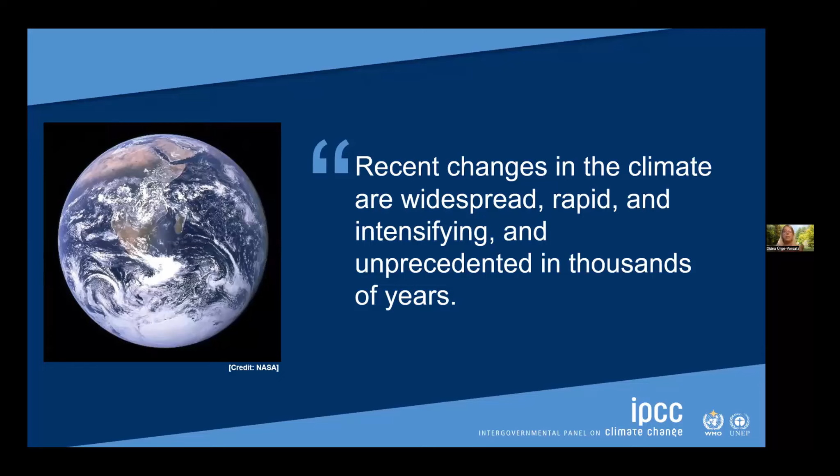But let's first get to the climate science a little bit. Our first report showed that recent changes in the climate system are already widespread, rapid, intensifying, and unprecedented in thousands of years. In fact, that's a very conservative number, because if you look at actual numbers, global carbon dioxide concentrations and ocean surface acidity have not been so high as today for 2 million years.

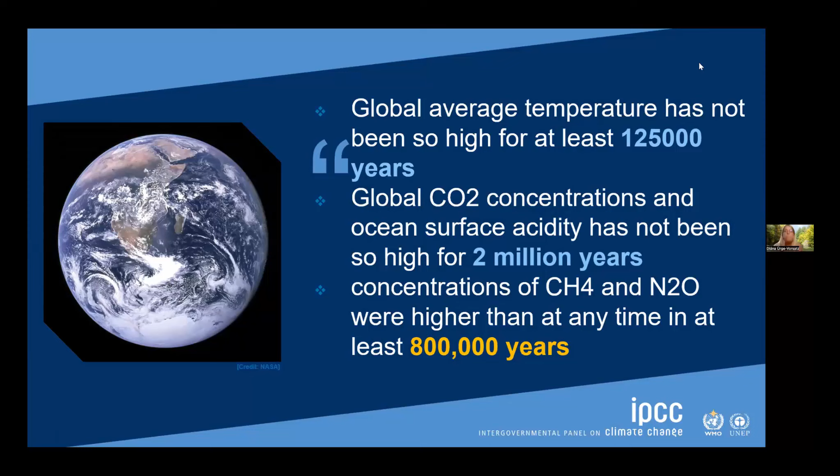Global average temperature has not been so high for at least 125,000 years. So in less than a generation, we have turned back the geological clock of the planet by anywhere between 100,000 to even 2 million years. Concentrations of methane and nitrous oxide were higher than any time in at least 800,000 years. So in very short time, we have already changed our planet very significantly.

The reports also show that, unfortunately, there are some changes in the climate system from which there is no more going back - meaning they are irreversible. For example, the ocean temperature will keep increasing even if we don't emit even a molecule more of carbon dioxide, will keep increasing for hundreds or even thousands of years.

The same with many ice sheets, including the Greenland ice sheet, but also the ice sheet in Antarctica, will keep melting and destabilizing for hundreds or even thousands of years. And along with these, the sea level will keep rising also for hundreds and thousands, or perhaps even on a 10,000-year timescale.

But even worse, there are the so-called tipping points, many of which we might be very close to. These are points in the climate system - and it's like when you swing on a chair, and if you let go, you swing back. But if you swing back a little bit too much, the chair wouldn't return, but just fell back and there was nothing for you to do. There are similar points in the climate system.

For example, beyond a certain point, we are just not going to be able to stop losing the Greenland ice sheet. And it's not very far, because it's anywhere between 2 and 3 degrees warming compared to pre-industrial average, and we are already above 1 degree, and may actually be reaching 2 degrees in the middle of the century - within lifetimes of many of you. Similarly, the collapse of the West Antarctic ice sheet, abrupt collapse of the Atlantic meridional overturning circulation, which is further for you, but for us is very crucial with regard to Europe's climate, the Gulf Stream.

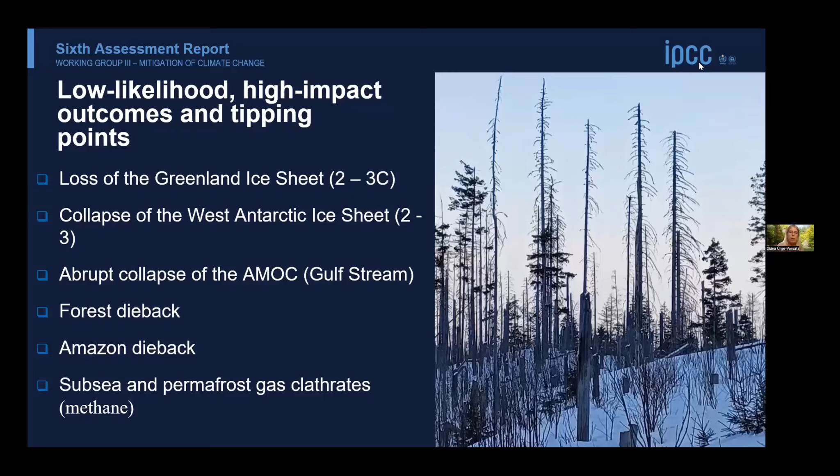But before you get too desperate, the good news is that some changes can be slowed and others can still be stopped if we limit warming.

The point is that even if a lot of things are already very bad, many things will be even worse. Historic temperatures are fairly constant, basically in the plus-or-minus 1 range for 10,000 years. And we already, in just a matter of 2 centuries, have shifted this by about 1 degree centigrade. It's almost certain that by the end of this decade we are already going to reach 1.5 degrees.

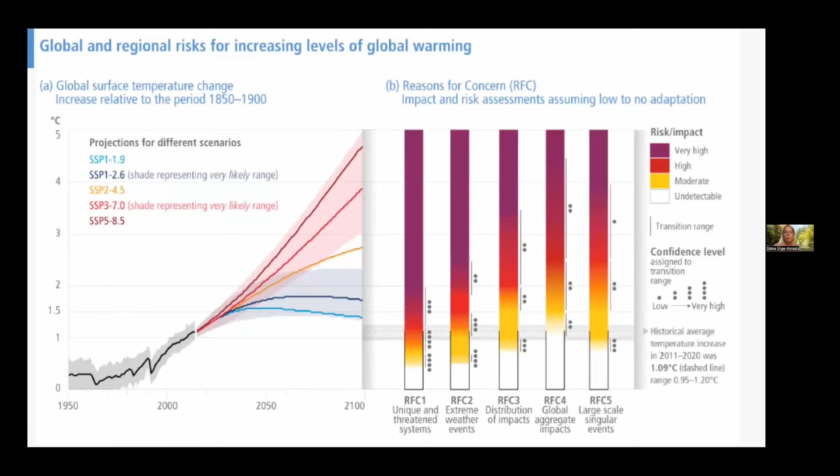But at 2 degrees, we are already entering in many systems - you don't have to read the different bars, because we do these bars for all kinds of systems. But the point is that the more reports we do, unfortunately, the red and the purple is going more down and down. In fact, in our previous report we hardly had any purple. But now with more understanding, we understand that actually the impacts are going to be more severe with lower temperatures, the more and more we understand.

So as I mentioned, it would be really important to try to keep the warming well under 2 degrees, or at best at 1.5 degrees. But unfortunately, what our report shows is that unless there are immediate, rapid, and large-scale reductions in greenhouse gas emissions across all sectors, limiting warming to 1.5 degrees will be beyond reach.

What do we have to do to limit warming? This means that limiting human-induced global warming to any specific level - meaning 1.5, 2, 3, 5, 6, 10, any degree - does require reaching at least net zero carbon dioxide emissions, along with strong reductions also in other greenhouse gas emissions. So that basically implies that getting out of fossil fuels, or leaving fossil fuels in the ground, is non-negotiable. We just have to leave them there.

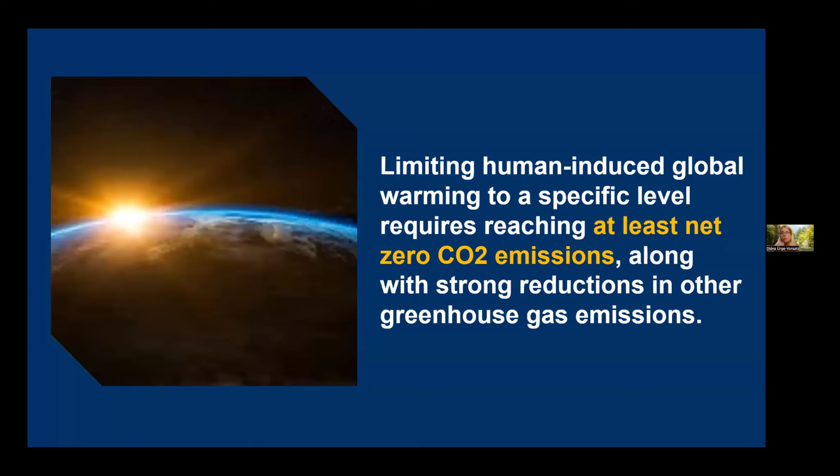So that means that if we have to do that anyway, the sooner we get there, the lower we will be able to stabilize temperatures. The quality of life of not only one generation, but hundreds of generations to come, really depends on how soon we can get this done. And that's a tremendous responsibility.

Now, the good news is that our report put a very big emphasis, for the first time in IPCC's history, on demand and services. So not only asking, okay, where can I get the next clean kilowatt hour of energy, but to first ask: do I really need that kilowatt hour of energy? Maybe first we should figure out how not to have to produce that next kilowatt hour of energy. And we have a whole dedicated chapter on that.

And the chapter shows that actually we have a potential to bring down global emissions simply through influencing energy demand by up to 70% by 2050. Buildings are among the biggest opportunities within that. However, it's important to point out that this can only happen if individuals are able to make the choices enabled by systemic changes, meaning changes by housing, changes by cities, and so on.

So we also concluded that it is possible to reach net zero emissions in the building sector by 2050. And the report really warns that action in this decade is critical to fully capture this potential, because of the long lifetime of buildings, and because every year we can only change a certain number, a certain share, of the building stock to net zero.

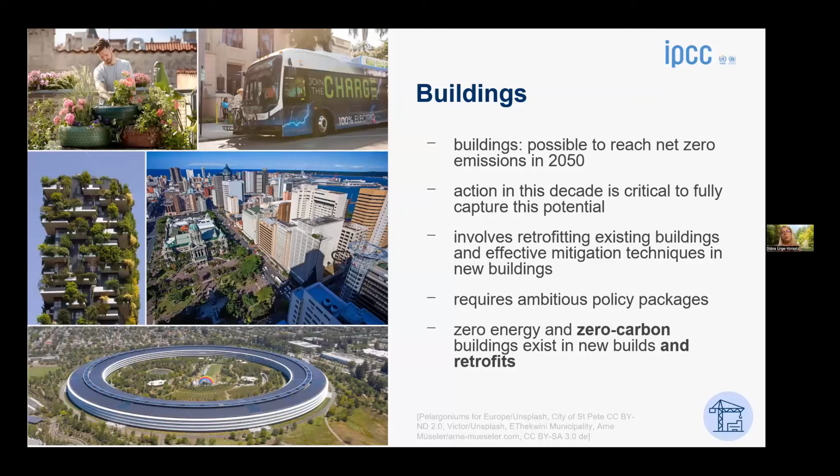So it does require ambitious policy packages, and retrofitting is crucial, especially in developed countries. What the chapter shows, which we also showed in our papers before, is that by today, in every climate and virtually every building type, it is possible to convert every building to net zero energy levels, not net zero carbon, but net zero energy levels.

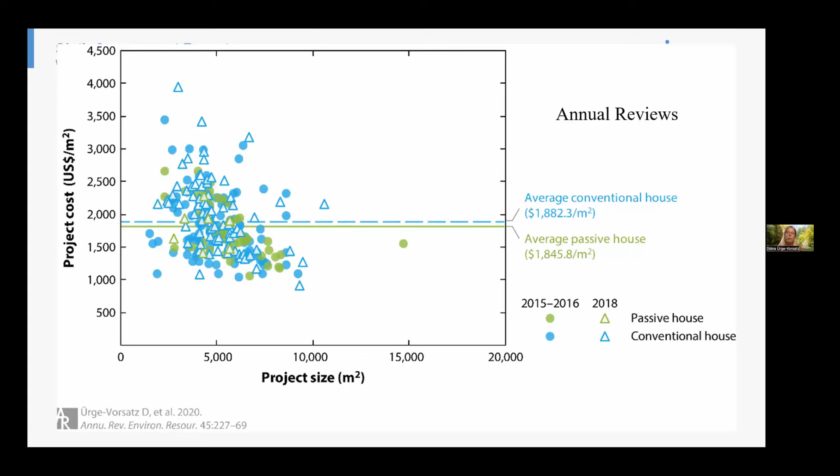There are many such examples showing this is not a cost question - for new buildings, it's definitely not a cost question. But we have to go on, as we mentioned, when we build buildings it's really important to try to avoid as much as possible energy intensive and carbon intensive materials. Maybe in New Zealand you have lots of timber, so that's very important, but not every country has a lot of timber - for example, in Europe we don't have that much timber.

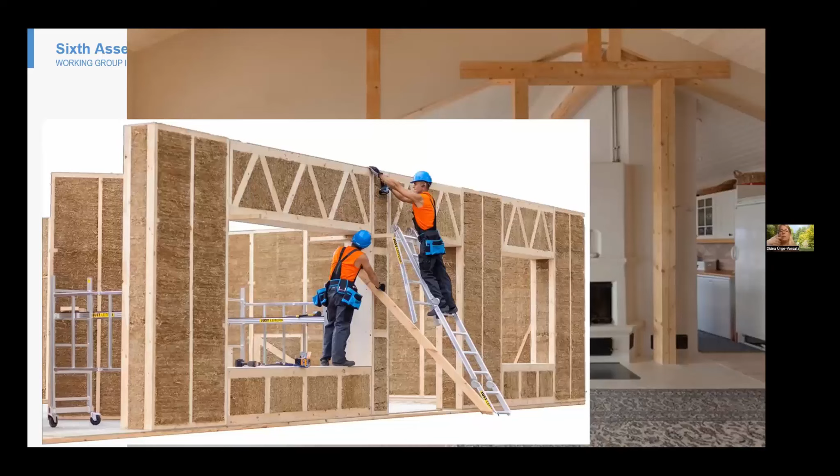Nevertheless, this house is actually made of straw. Even straw is an excellent material, and there are now multi-story buildings from straw, highly industrial. I don't know if you have these building materials available, but the point is that they capture and store carbon, and the longer the building stands and is used, the longer it's storing the carbon - so it's a double win. It's also very important.

And, sorry for the Hungarian text, but what we also showed is that retrofitting even for historic buildings is possible for net zero. This is actually going to be the new home of my university, and this is the biggest Art Nouveau building complex in the world. This is in Vienna, designed by Otto Wagner - it's a beautiful building ensemble.

What we showed in this research project is that even this beautiful old building district can be retrofitted to an energy positive district - turning it into the power plant of the 21st century, while observing the strictest national monument protection rules. All of the characteristics and criteria for observing and respecting the work of Otto Wagner will be maximum preserved. And not only is this going to be an energy positive district, but what we are showing here - you don't need to look at the details.

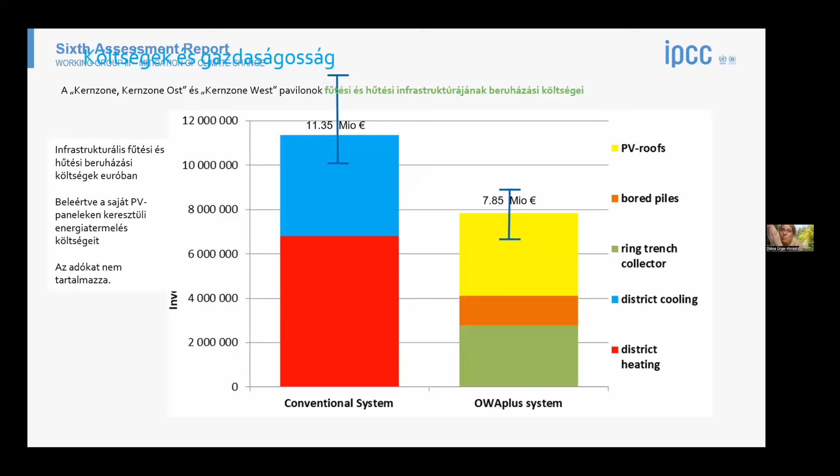But if we know this is really a win, you can eat the cake and have it, and get paid for eating the cake and having it. But we are still not doing it at scale, and that's very concerning. The only thing I can imagine is that we all know there should be change, but none of us wants to change.

And if we continue, we really will be in trouble, because our future is determined by a sum of reducing emissions, adapting to the remaining climate change where we couldn't reduce emissions, and where we can't adapt, there are many things to which we will not be able to adapt, and the remaining suffering. But today we can still determine what mix of these three our future will look like.

Now we can still choose how we want to mitigate, which technologies, which ways, and so on. But in terms of how we will suffer the impacts of climate change if we fail to mitigate thoroughly, we will have no choice. So our future climate depends on our actions today, and on you not allowing any other type of building to be built, and on you making sure every building you touch is retrofitted to net zero energy. Because every time we miss that, we may be locking ourselves into a higher temperature future. Let's look up. Let's not do like the dinosaurs did.

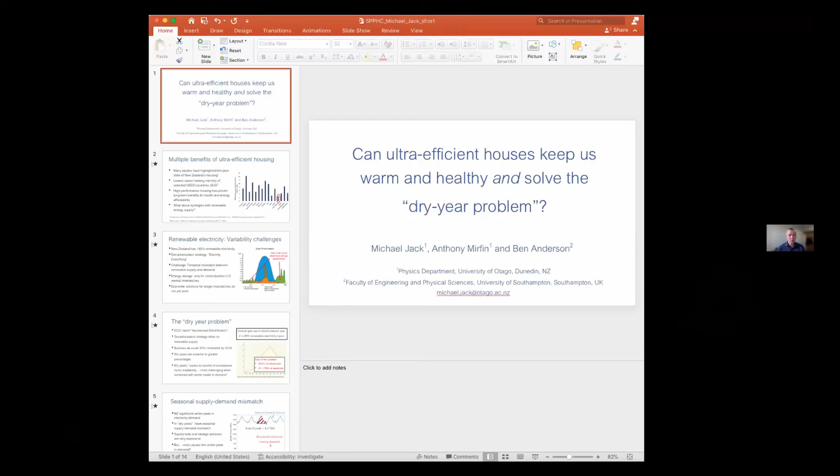So I'll just share my screen now. Can you see that screen okay? What I want to talk about is, I guess, a very New Zealand aspect of energy efficiency.

So it follows on really nicely from the global perspective that we just got. This work was done in collaboration with Anthony Mirfin, who was an undergraduate student at the time, and Ben Anderson from the University of Southampton.

Many studies have highlighted the poor state of New Zealand housing, and you'll probably hear a lot more about this in the rest of the webinar. One example is that in a recent BRANZ report, 46% of dwellings are not heated in winter in New Zealand. A third of houses are regularly heated. Half of children's bedrooms are not heated at all, and there's visible mold in half of the houses surveyed. So there's a lot we can do to improve our housing.

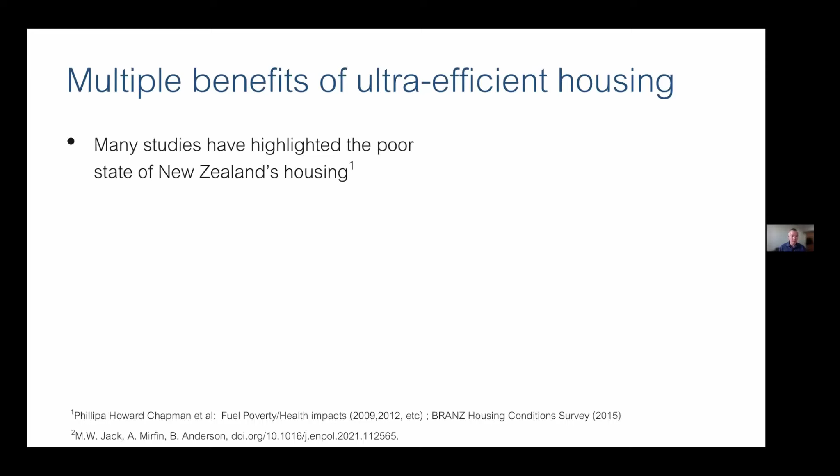And I like to show this graph because I find it quite interesting. If you take the IEA statistics, you can see that New Zealand has the lowest intensity of space heating for all OECD countries, and this has been corrected for temperature. Now, at first sight, you might say New Zealand seems to be extremely energy efficient, more energy efficient than Japan with their apartment-style houses. But the fact is that our low space heating intensity is because we significantly underheat our houses compared to all these other countries.

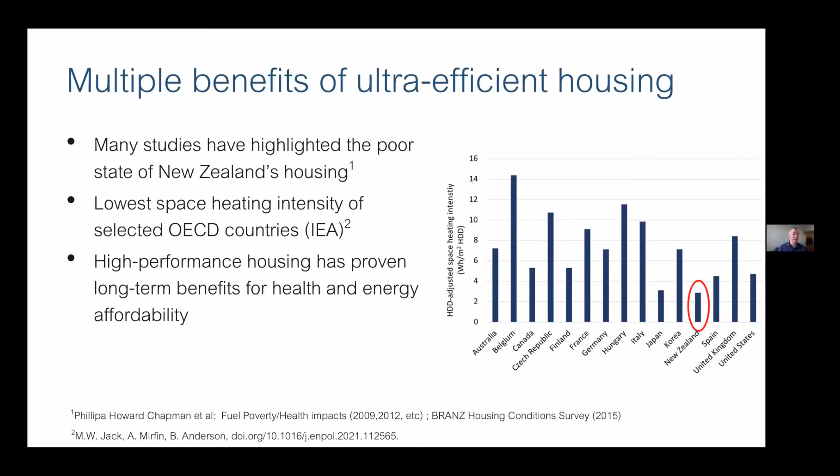I'm sure there'll be more talks about how high-performance housing has really proven the long-term benefits for health, energy, and energy affordability. But what I really want to focus on here is the synergies between energy-efficient housing and renewable energy supply.

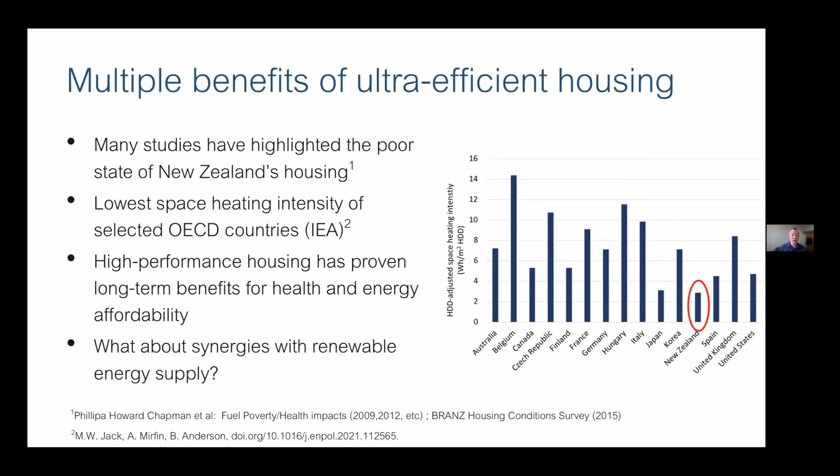In New Zealand, we've already achieved around 85% renewable electricity. So it's kind of obvious that our decarbonisation strategy is basically electrify everything. So this is taking transport and heat, electrifying transport and heat, and supplying that with renewable electricity.

So that brings me to the dry year problem. This has really been clearly articulated in the Interim Climate Change Committee report, Accelerated Electrification.

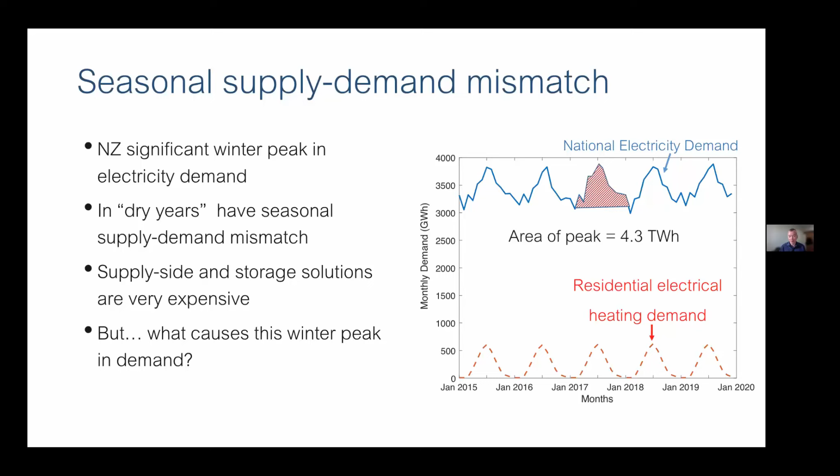I'd just like to show you a little clue down the bottom here. This is residential electricity supplies, so this is heating demand estimated. I'll come back to that in a moment, but that's a bit of a clue of what's causing that issue and what we might be able to do about it.

So because of the dry year problem, MBIE has created this thing called the New Zealand Battery Project. The idea is to try and solve this dry year problem.

Now there are a bunch of options that have been talked about. One of them is overbuilding renewables, which basically means creating enough renewables that you can cover your peaks. But of course that means in some cases you have more renewable energy than you need, which would probably occur in summer in the New Zealand case. In the electricity sector they often call that spill, with an analogy to hydro, but essentially you're losing that supply, and it means it's an expensive option.

Another option is large-scale demand interruption - this might be turning off some very large-scale industries for an extended period of time. We're talking about 8 months here.

Another option is geothermal. We have lots of geothermal energy in New Zealand. We could use our geothermal much more strategically and turn it up and down to follow demand. This is not really the way geothermal energy is used at the moment - it's much more of a base load.

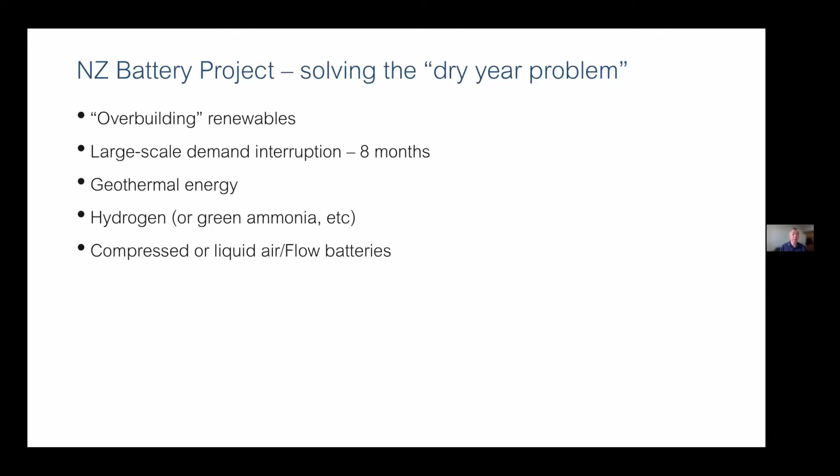We could use hydrogen or hydrogen derivatives, green ammonia, etc., to store the energy. We could also store it using things like compressed or liquid air, compressed air, flow batteries, etc.

The solution that is probably the one people are most interested in is this idea of a pumped hydro storage scheme - very large scale pumped hydro storage, and even a location has been thought about for this. It's at Lake Onslow. The idea of pumped hydro storage is where you have excess energy, you pump the water back up to a reservoir, and when you need that energy, you let it back down through your turbine and generate again. These are very common, the most common large-scale energy storage systems in the world, and as you can see, this Lake Onslow idea offers about 5 terawatt hours of storage.

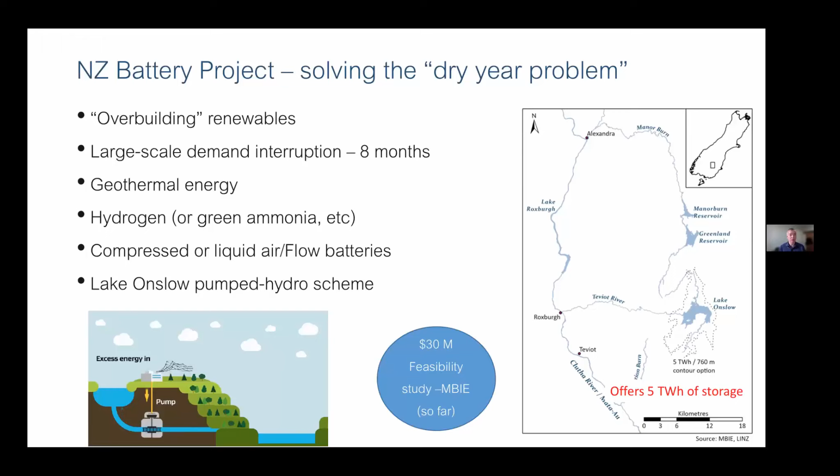And so MBIE have spent around about 30 million on a feasibility study to investigate solving the dry year problem.

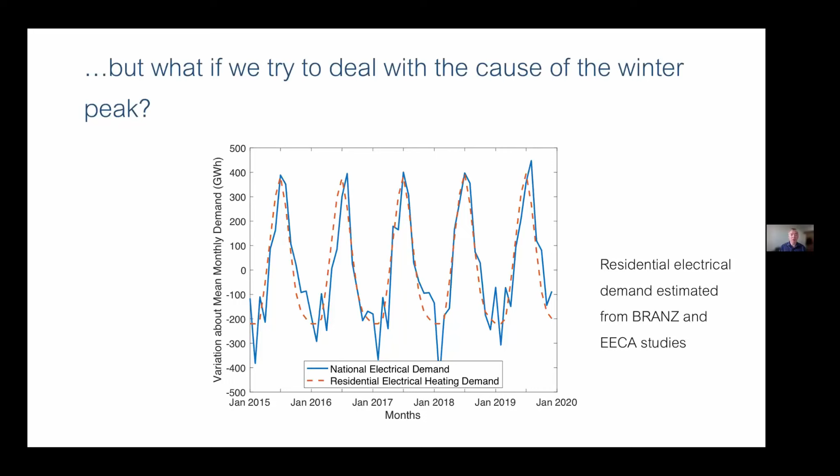Because of this, we wanted to study whether, if we went to very efficient houses, we'd be able to reduce this peak, and therefore this dry year problem, this winter peak problem, could go away. So this is what we set out to do.

Bit of tongue-in-cheek here. As I said, we used a talented undergraduate student to do this study, so they cost about 5K compared to that 30 million.

We took a strategic approach for this study. We really need to be looking at a long time period, since houses exist for a long time. You really need to consider a long time period to understand the impacts.

We focused on detached houses, and we could be criticized for this since a lot more apartment buildings are being built. However, at the moment, we're still getting around 90% of our floor area from detached houses, just because they tend to be larger.

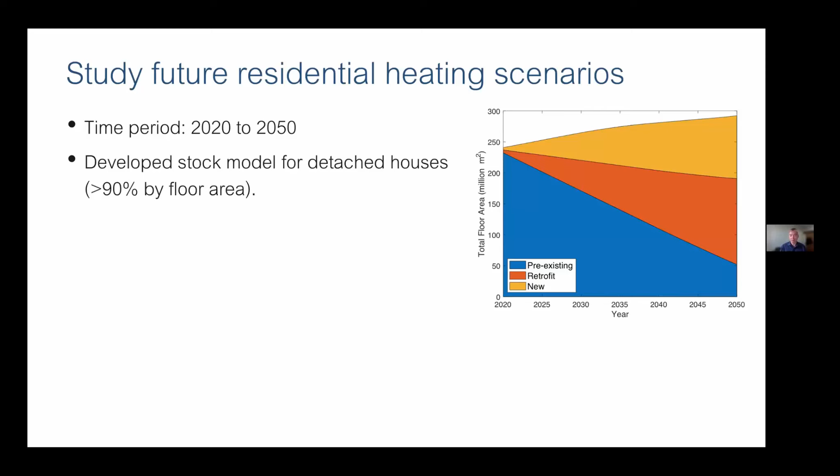A whole lot of assumptions went into creating this stock model. This is the total floor area of housing in New Zealand, and we considered both new houses and energy efficient retrofits—quite an extreme rate of retrofit that I've shown there, but it's something we kind of need to do if we were going to have a large impact. If we just focused on new houses, that would not be enough.

We considered a range of different building standards for new builds and retrofits—this should be of interest to this audience. We looked at the New Zealand Building Code, before the latest iteration. We considered a medium and a high scenario, related to Homestar standards, and then a very high scenario, essentially the Passivhaus standard, including the retrofit standard.

We also looked at another scenario, a progressive scenario, taking the current building code and over time, up to 2050, moving to a Passivhaus standard. The idea behind that progressive scenario was to say, if we did this really slowly, would we get the same benefits as if we did this really fast? That's very related to Deanna's talk.

We also assumed all houses were heated to healthy temperatures, so we chose 20 degrees. We've since done scenarios with 18 degrees—the results change a little in number, but the basic idea doesn't change. In running these scenarios, we thought, do we really want to consider future scenarios where our houses are not heated to healthy temperatures? Is that really the sort of future scenario we should be looking at? Or do we need to say our baseline is healthy temperatures, and see what energy efficient houses do from that.

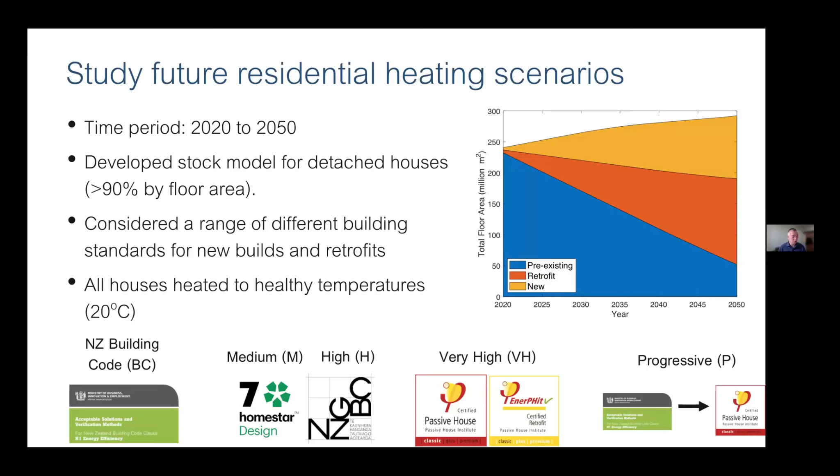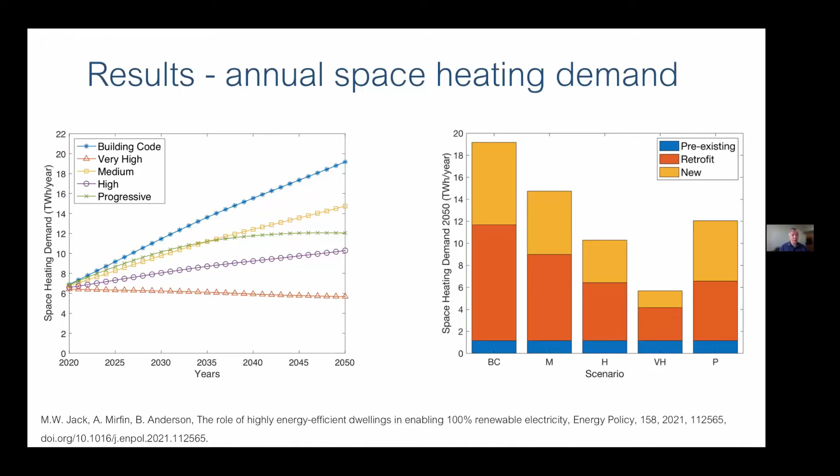So the key result I really want to show you, and the aim of our work, was really around the seasonal demand. The scenarios I showed you before could have easily been done with most modeling tools. Our approach enabled us to essentially work out a whole house R value, or a whole house U value, based on a building code, a building standard, and that enabled us to then take temperature data to look at what that means from a monthly level.

We did this for 18 locations throughout New Zealand, and this is the accumulated result. So what I'm showing here is the monthly space heating demand in 2050. The orange line on top is the building code, or what used to be the building code. Our current space heating demand is also shown in the black dotted line.

And I guess the first point here is that, because we're now heating to healthy temperatures, we have increased that peak in demand. We've almost doubled it. So this is sort of saying, okay, now our dry year problem has got worse because our demand has increased significantly.

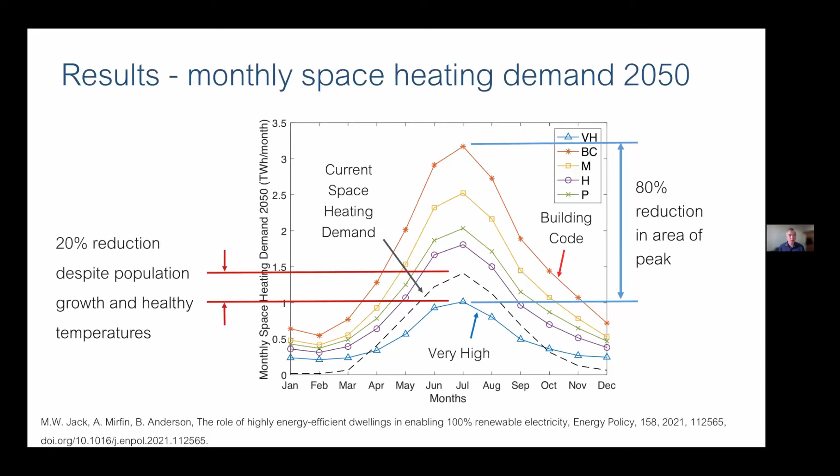So that's the building code there, and the very high scenario right at the bottom, and there's an 80% reduction in area under that curve. I've just shown you the difference in peak, but what I actually want to focus on is the area under that peak, because that's the amount of storage you require, and that's this idea of the big battery project. So here we've got an 80% reduction in peak. It's interesting that you even get a 20% reduction in area under the peak compared to the current situation.

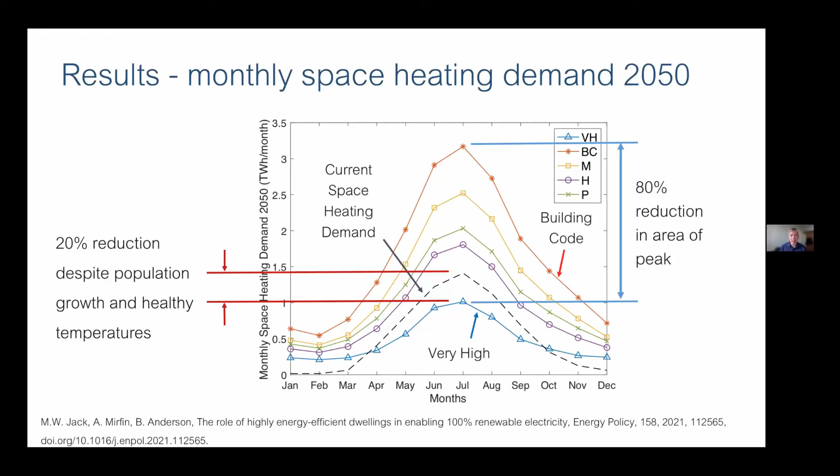So in 2050, if we went with this very high scenario, we would get this reduction in peak despite population growth and healthy temperatures. If you want more details about this, that publication down the bottom there provides you with that. I haven't had time to talk in lots of detail.

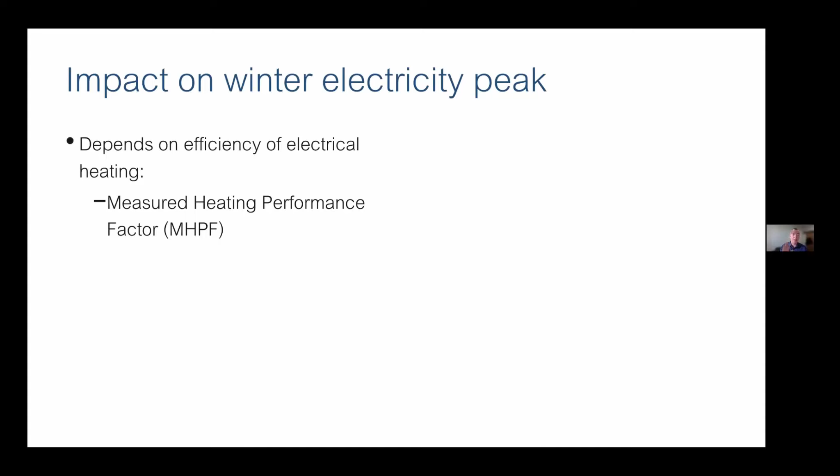But let's see what the impact of this is on the winter electricity peak, because what we've calculated there is just heating demand. What we really need to think about is what is the electrical heating demand. And that really depends on essentially technologies for turning electricity into heat. What we want to use here is this thing called the measured heating performance factor. So this is the overall countrywide conversion of electrical energy into heating energy.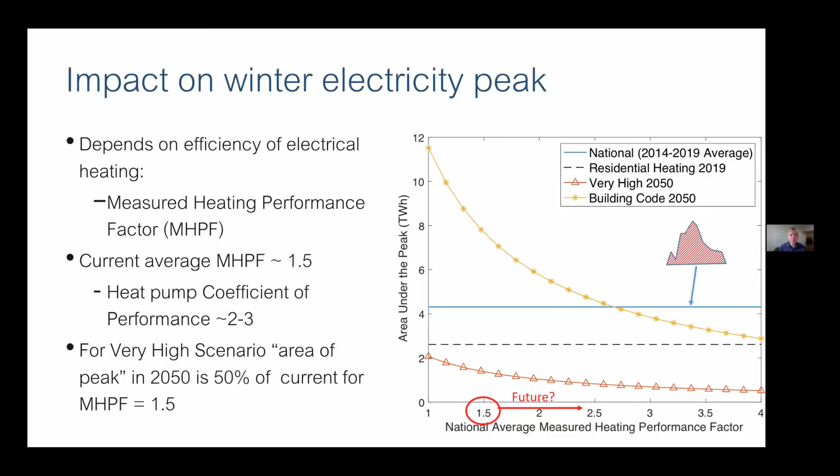I also want to talk a little bit about greenhouse gas emissions. This is just me doing some back of the envelope calculations, because what we really care about is greenhouse gas emissions. Often it's said that buildings are responsible for not a very large percent of New Zealand's greenhouse gas emissions, and here I'm talking about operational emissions. The 20% figure that is often talked about is life cycle emissions, from the building sector as well as from the operation of the houses themselves.

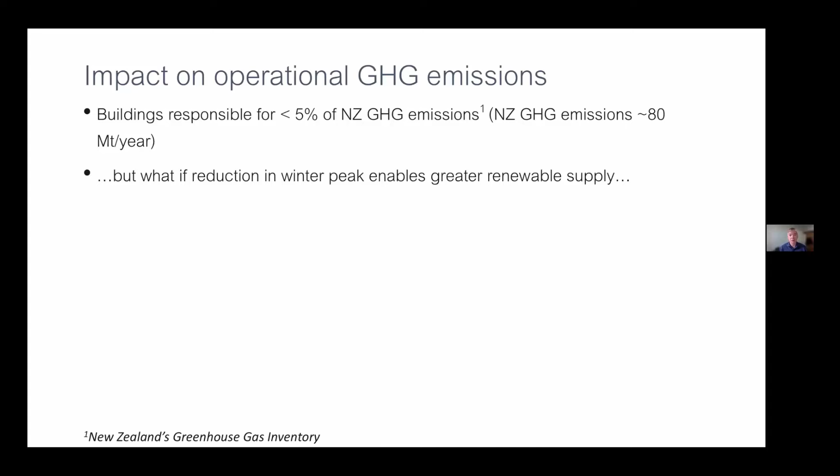So it kind of seems like, okay, if it's only 5% of our greenhouse gas emissions, there's not much you can do about it, not much room to move in terms of reducing emissions. But what I want to talk about is: what if the reduction in the winter peak enables greater renewable supply? Because that's going to affect not just the buildings themselves, but everyone else, because you've helped make New Zealand more renewable. So let's just humor me and see where this goes.

If we look at our residential greenhouse gas emissions from the numbers I just showed you, comparing business as usual to nearly zero energy housing—essentially the passive house standard, the very high standard I was showing you—we get a little bit of a reduction in our greenhouse gas emissions out to 2050. It's not huge. This is just due to an increase in operational efficiency.

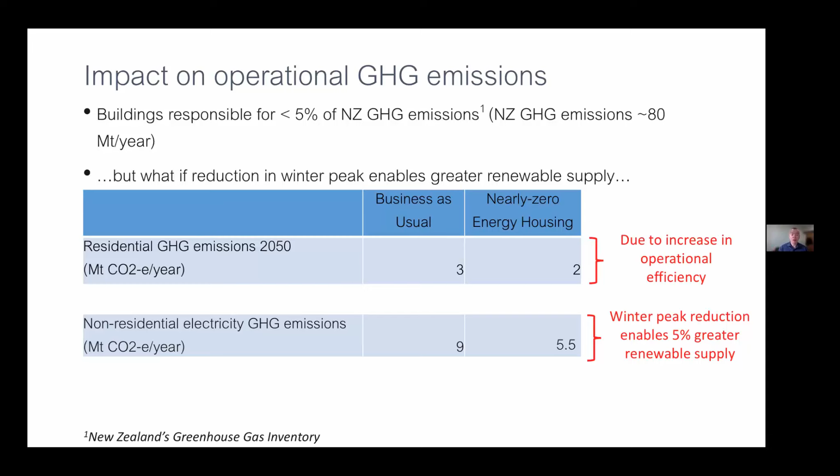But then if we compare that to what effect we might have on greenhouse gas emissions across the whole of New Zealand—let's suppose that the winter peak reduction we've achieved enables 5% greater renewable supply—then we get a much larger decrease in CO2 emissions, because essentially we've changed the emissions factor for electricity for the whole of the country. So my point here is I want to tie some of these things together, because I don't think they should be considered independent.

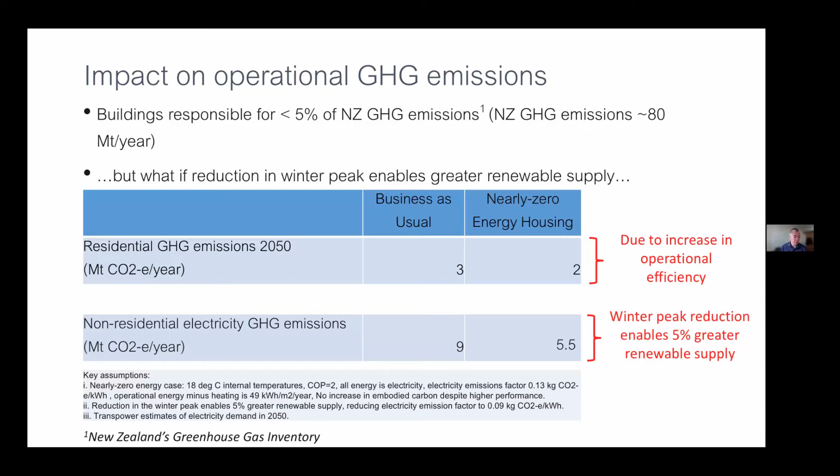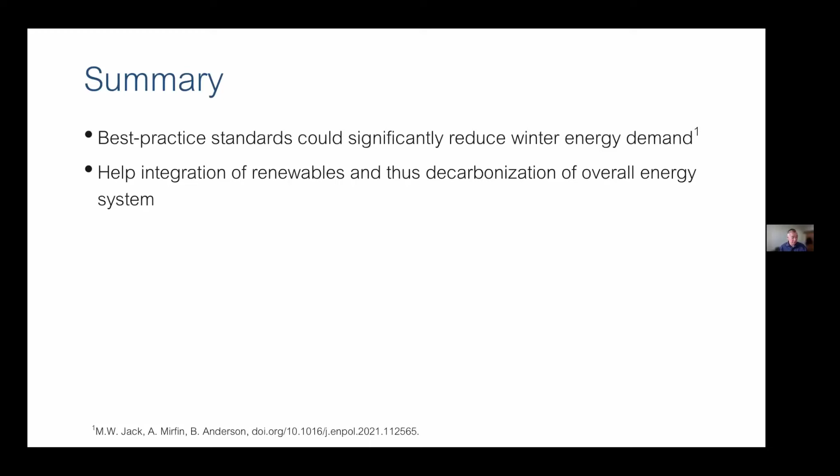There's a whole lot of assumptions behind the numbers I just threw about. So I want to summarize this research now. Basically, best practice standards could significantly reduce the winter energy demand, and that could help integration of renewables and thus decarbonisation of the overall energy system. Our results for the progressive scenario show that slower implementation will significantly delay benefits.

Retrofits are critical—they make a huge component in 2050, even with our very rapid retrofit assumptions. So the message I'd like to send to government is that we need cross-sector policies in this area. Just echoing Deanna's statements, we really need to mandate energy efficient residential buildings, probably all buildings, based on their wide-ranging health, efficiency, and energy affordability benefits. The only thing I've added to this—those are things that are well known—is their role in decarbonisation as well.

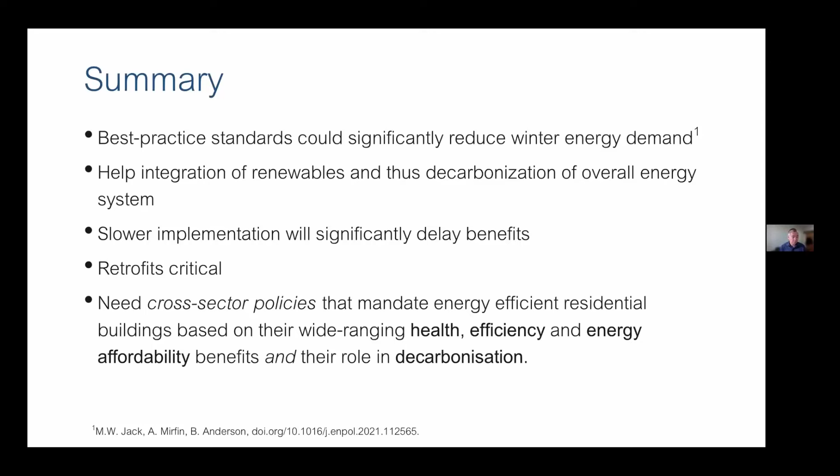Before I finish, I want to quickly talk about what we're planning to do next. One initiative underway is that the New Zealand Green Building Council and EECA have taken this research and are looking at the economics of investing in energy efficiency retrofits. As Deanna said, new builds almost pay for themselves, but what about retrofits versus these large infrastructure projects? Can we actually compare like for like in those systems and see which is more economic?

Is it better for the government to spend money, say, on subsidising energy efficiency retrofits rather than building a large pumped hydro scheme? We also want to take our building scenarios and put them into a model of the electricity system. What I've given you here is just an argument for why these buildings might have an effect, but we really need to test that.

We also want to look at net zero energy buildings. So the next step from this is not just nearly zero energy buildings, but net zero energy buildings. Does that undo some of the benefits we've just talked about? If you put solar PV on the roof of these houses, because of the summer disconnect, does that actually unpick some of the benefits I've talked about?

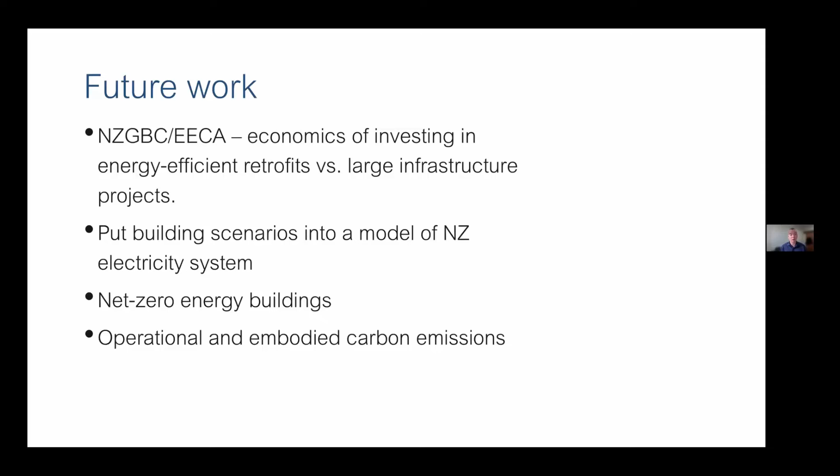Also, as Deanna talked about as well, it's not just operational emissions, it's embodied emissions. There are ways of combining these two things together and looking at potential trade-offs between those two. So that's our future work.

Finally, I just want to say, it's really critical we get this right. The point here is that we have very, very long-lived infrastructure. We have electricity infrastructure with a 40 year lifetime and buildings with an 80 to 90 year lifetime. So it's basically the longest lived infrastructure out there, and we really need to get moving now on this.

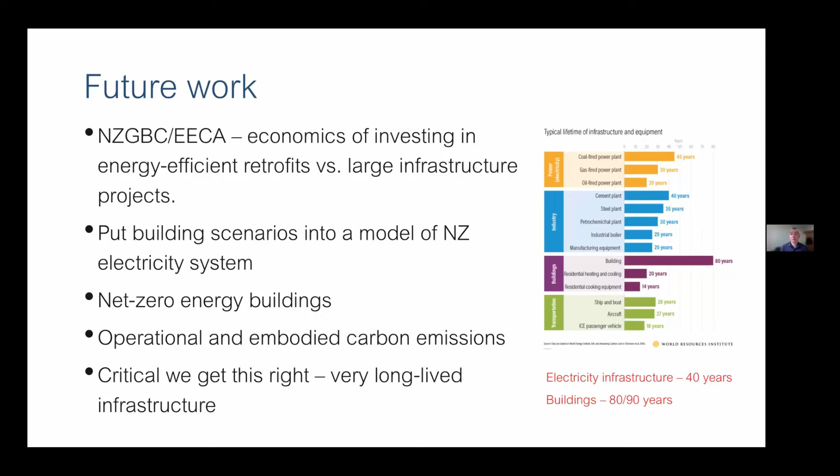Just going back to your early supply and demand mismatch graph, someone's asked, what if we add a wind renewable energy source into that? Yes, wind. So wind tends to be quite even across the year, it doesn't have as much seasonal variation as other sources. Was it about this graph here?

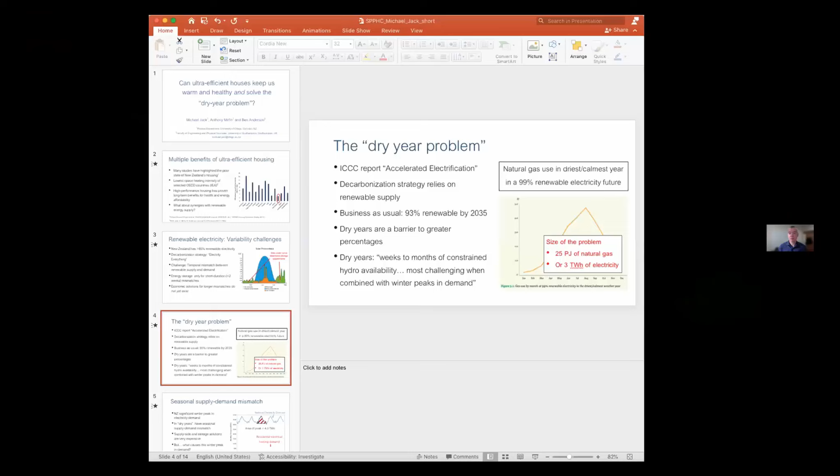This one? So this is considering wind. This is a 99% renewable electricity future, and what they mean by that is most of the time we're 99% renewable, so average 99% renewable. There are some times during the 50-year time frame they looked at that we couldn't supply what we needed, and so we needed gas. So this assumed lots of wind.

Okay, thank you. And what population growth was assumed in the study? Yeah, so I can't remember the details, but we basically used Stats New Zealand estimates for everything we could.

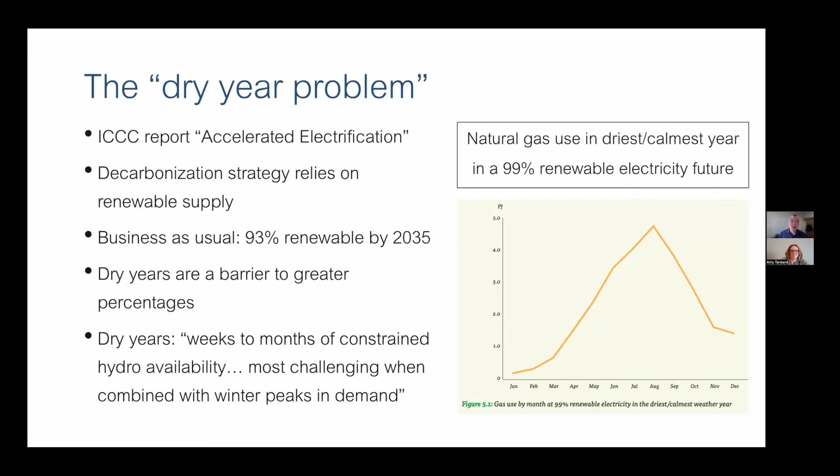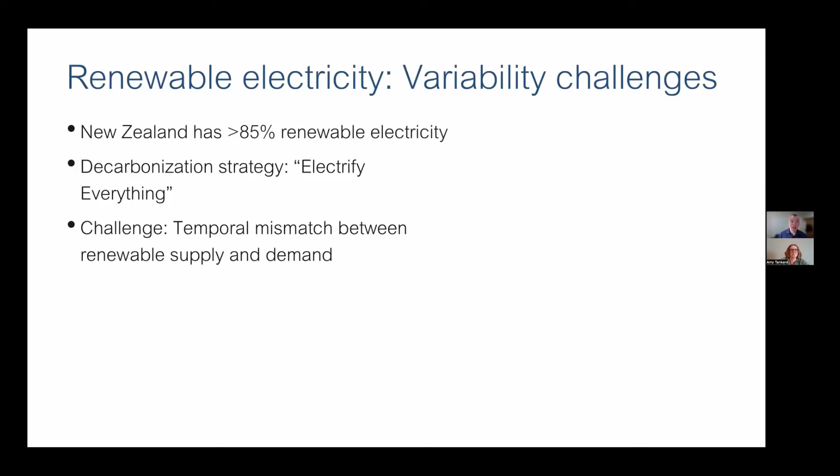And how do you see the adoption of electric vehicles impacting the dry year problem and overall demand? Yeah, so that's interesting. A lot of my research has not been focusing on this seasonal side of things, it's been focused more on the daily demand issues, kind of what I was talking about with solar photovoltaics. This is of immediate interest to, say, distribution companies. They really care about daily demand and what impact electric vehicle charging is going to have on top of this.

I guess during my research, I've come to the conclusion that there are options. There's battery storage, there's demand response, there's smart control. There's a whole lot of options for that smaller daily, even 2-day type mismatch, and so I put electric vehicles mostly into that category. The only caveat is that some of our recent research has shown there is some seasonal variation in electric vehicle charging as well, which turns out to be basically due to people heating their vehicles in winter, interestingly.

Okay, thank you, so just one last question here. Obviously your focus is on heating, what consideration have you given to cooling? Yeah, no, good point, that's what we would like to look at in future work. Initial results show that it's quite small. Except in Auckland, and that does even things out a bit. I guess the point there is that cooling is a very nice match for solar PV, so I'm less worried about cooling as a problem. But it does smooth the seasonal variation a little bit, especially in Auckland.

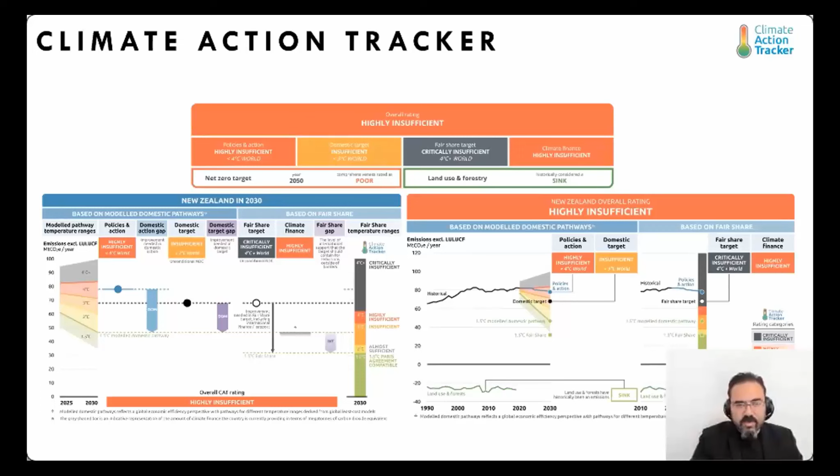As difficult, complex, and challenging as it may sound, there is a trajectory which has been outlined by the government that, if followed, will get us there.

However, simply defining strategies will not necessarily work out. There needs to be implementation mechanisms at different stages, different layers, and different scales attached to these strategies, and monitoring bodies ensuring that these strategies and implementation mechanisms are followed. And if so, there is hope that we still can meet the targets.

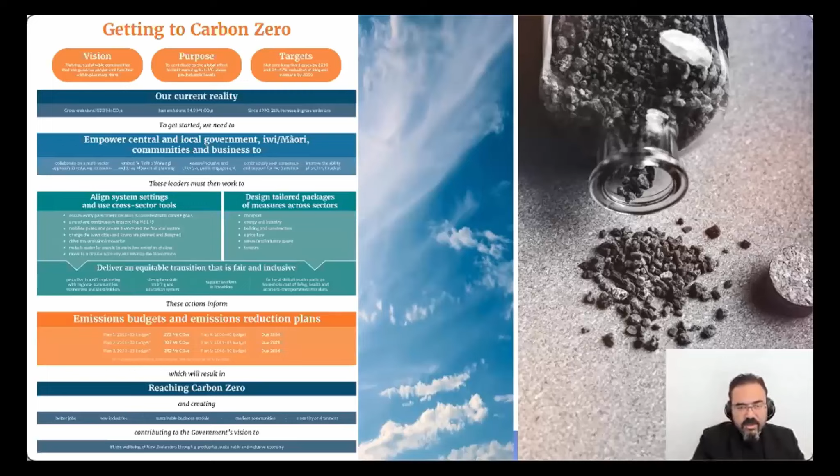A major focus of many of our research works is the Auckland 2050 plan. We strongly believe that it's a highly comprehensive plan, and if properly followed and coupled with practical recommendations, has the potential to make meaningful impacts on the quality of our life in the very near future.

Materializing sustainability concepts, unfortunately, is not as straightforward as it may sound. In the case of New Zealand, and most specifically Auckland, we have a major issue when it comes to housing affordability. Making our houses more sustainable may mean that there would be a need for a higher rate of initial capital investment. However, there needs to be proper education.

There needs to be proper campaigns to inform the end users that in many cases, these initial capital investments will result in a much higher quality of life and eventually can be paid back in a certain life cycle.

One of the main things that should happen, and we're very happy to see that the Auckland 2050 plan includes this as a core in the implementation criteria, is distributing equities fairly among the main 6 nodes that they have suggested, especially after the COVID pandemic, and realizing that there are alternative ways to how we take care of our daily routines, such as working from home.

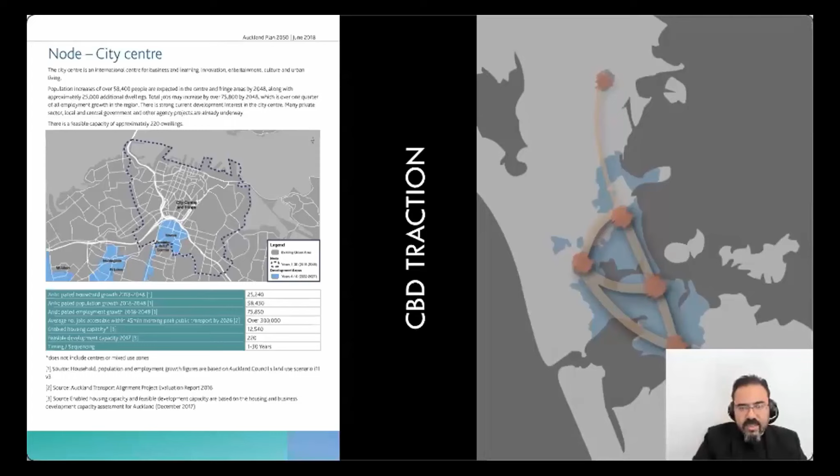So we need to be thinking creatively, focusing on the 6 nodes that are outlined there, and ensure that there's equity among them. On the same note, similar to many other countries, aging infrastructure is a major issue that New Zealand faces these days.

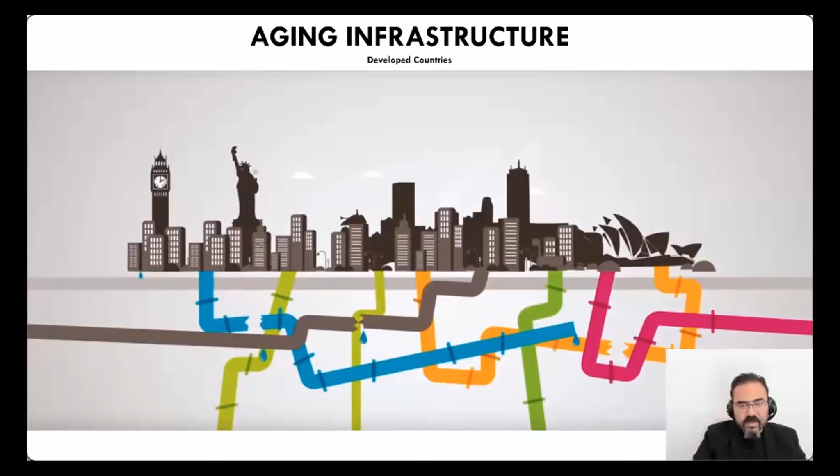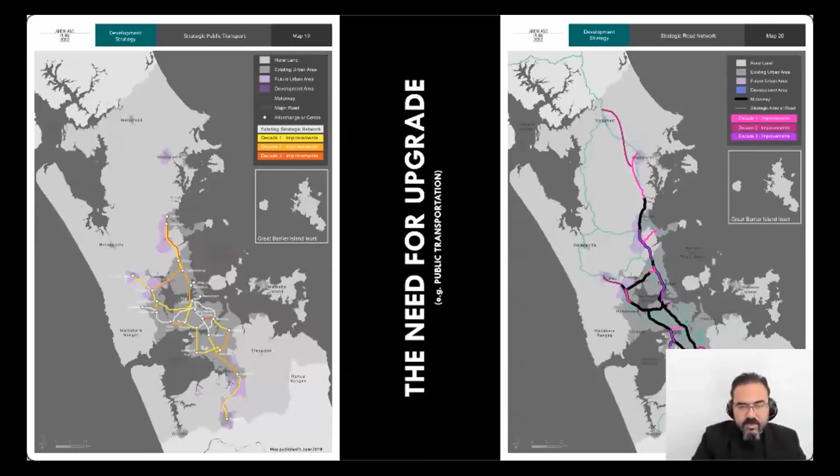As such, there's a need for major upgrade. And obviously, the upgrade works cause lots of disruptions to day-to-day activities and come at a very, very high price.

Thus, we always advocate for thinking outside of the box, identifying creative solutions, and trialing notions and concepts that one day might have sounded impractical, but may fit the requirements of an emerging environment.

One of which is the necessity for a cultural shift. As such, here at the School of Future Environments, we do our best to train professionals, also at graduate and undergraduate level, who would support adoption of new norms for an environment which is highly evolving and resilient, flexible, sustainable, and accepting of new technologies and new lifestyles.

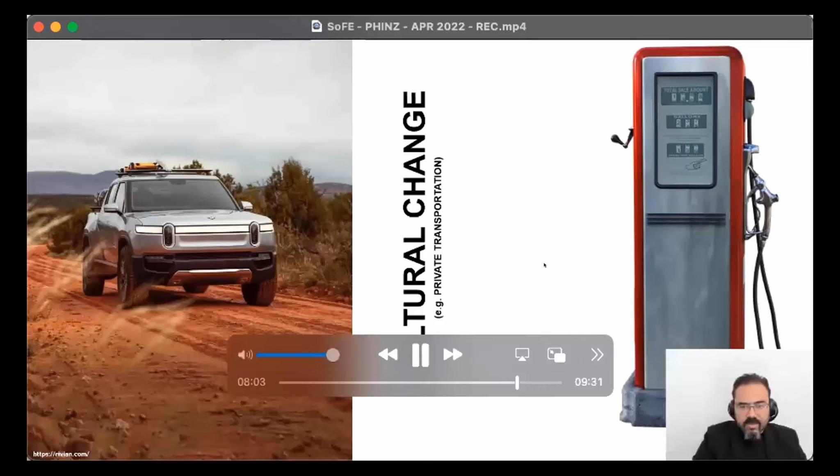In summary, in order to safeguard our future and the future of our following generations, there is a need to make a change to our daily lifestyle, to our routine activities, to our building industry, to how combinations of our buildings form neighborhoods, how the buildings will interact with one another, and how these neighborhoods can eventually formulate smarter, more sustainable cities. It requires collaboration among academia, industry, and the policymakers.

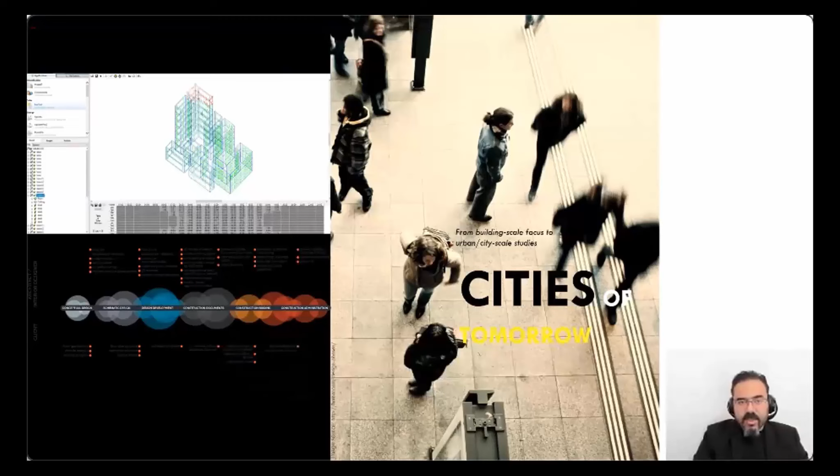And as such, I hope events such as the Passivhaus Institute session today and onwards can support and promote this required collaboration. On behalf of AUT and the School of Future Environments, I would like to thank the organizers for the opportunity and conclude my thoughts by reciting a karakia.

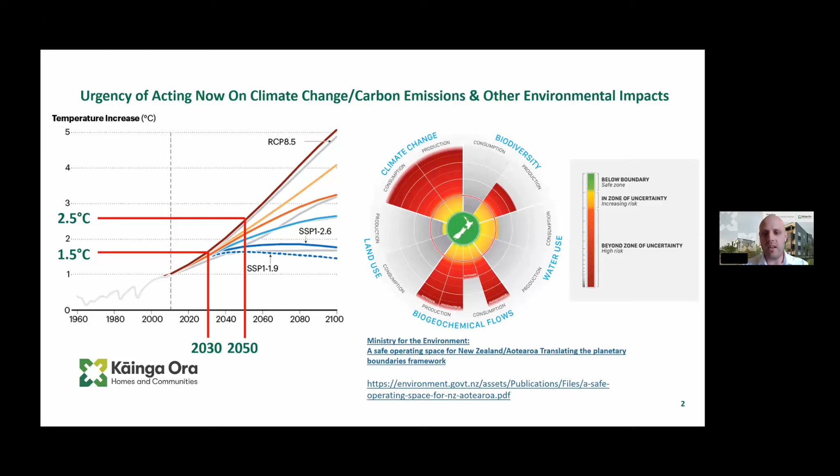My personal hope for all of this is that we can leverage the solutions that we develop and the will globally to solve the global climate change problem, and then also solve some of the other challenges we have, especially around biodiversity. That's one of the reasons why at Kāinga Ora, our sustainability program is focused on a much more holistic look at the environmental impact of Kāinga Ora's activities.

So our vision is that Kāinga Ora builds homes and communities that support people to live sustainably. Our focus areas are up the top: carbon neutral housing is the area that I lead, but we have areas of enhanced nature, biodiversity, efficient resource use around specifically our infrastructure and also construction and demolition waste, sustainable transport, climate change resilience and adaptation. And then for this audience, there would be particular interest in our internal environmental measurement program, where we measure and evaluate the post-occupancy performance of the passive houses that we are building.

I'd like to talk a little bit about the life cycle carbon emissions of buildings, and then emphasize the point that the timing of the release of those carbon emissions is really important. If you haven't already seen the figure on the screen, please start familiarizing yourself with it. It's going to be absolutely critical for the future of our industry, underpinning how we calculate, measure, and report on the life cycle carbon of not only buildings, but also infrastructure.

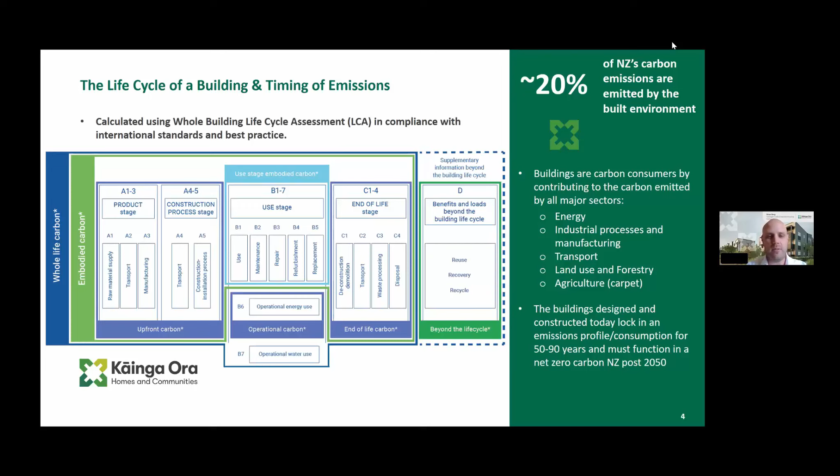This figure is from the MBIE Building for Climate Change documents that came out a couple of years ago, and it again emphasizes the importance of the timing of emissions. Up front, we have the big initial embodied carbon - the emissions associated with the manufacturing of materials, transportation of those materials to site, and then the construction of the building. That's what we're releasing now with this really large building and infrastructure boom underway.

Over time, we've got the operational emissions, primarily through the energy use of the building, being distributed throughout the building's life. And then again, another peak when we look at end of life: deconstruction, demolition, and disposal.

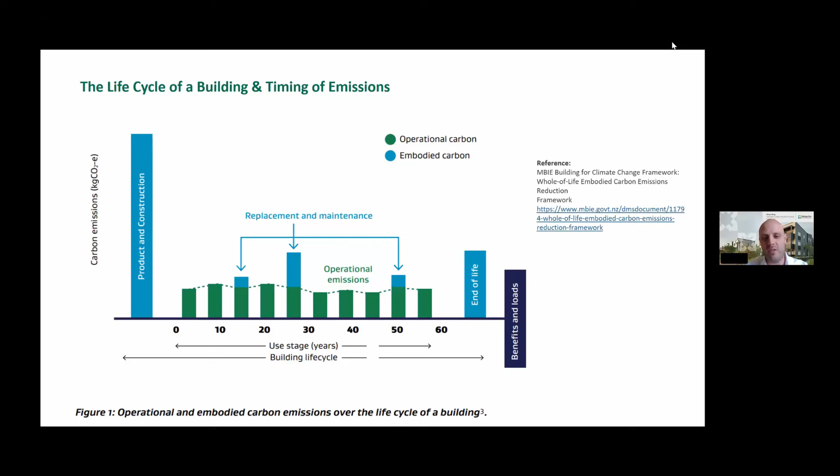What's really interesting is when we start applying whole building, whole-of-life frameworks to a large projection of the infrastructure and buildings we're going to be building. This is some of the work we've been doing at Kāinga Ora as part of developing our emissions reduction plan, which is part of our compliance with the carbon neutral public sector.

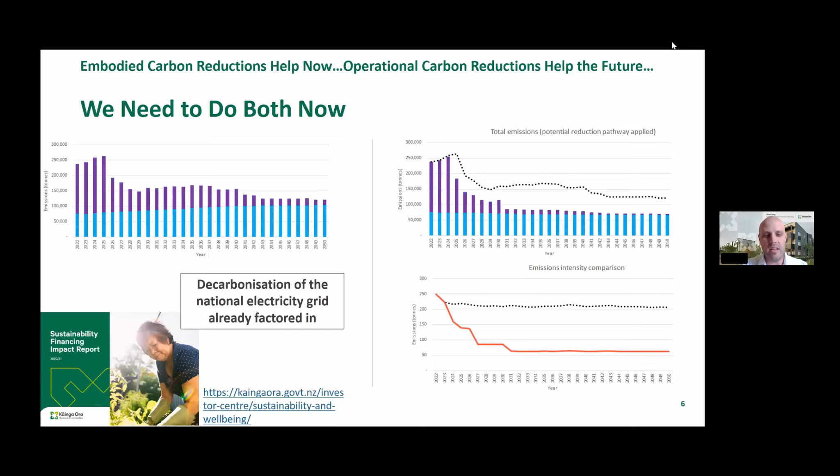The final graph on the bottom right shows the emissions intensity of the options we've looked at in that decarbonisation scenario. The dotted line represents our baseline, business as usual, and the red line represents the jumps or drops we would make over time as Kāinga Ora decarbonises in line with the MBIE Building for Climate Change program and our own aspirations. The big point to make is that we've already factored in a decarbonisation of New Zealand's national electricity grid, which really highlights the importance of energy efficiency and using less electricity in our buildings.

Talking and quickly presenting on some of the work coming out of BRANZ and Massey University. This is work that Louise Bullen presented last year at the LCANZ conference, looking again at what our electricity, or the carbon impact of our electricity, is going to be.

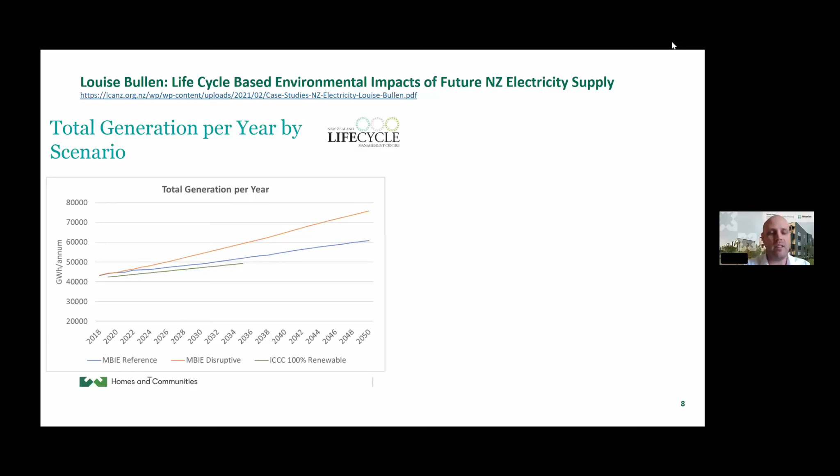You can see as we decarbonize by increasing electrification, we are going to need more electricity generated. But what we need to do is consider how that's going to be generated, trying to bring that in line below these dotted lines, which is a 1.5 degree planetary boundary. Have a look at the presentation.

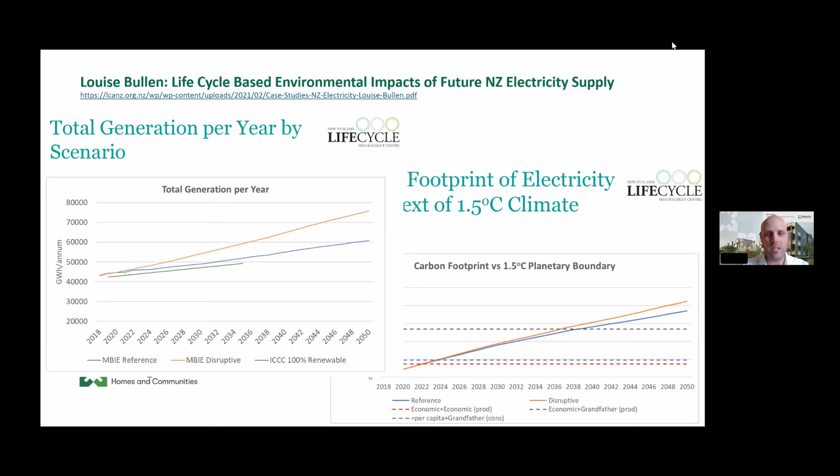Okay, talking a bit more about what's going on at the moment.

Government, as Minister Wood said, is positioning itself to lead the way through the carbon neutral public sector. We also have the New Zealand government procurement rules, which are about accelerating government's uptake of MBIE's Building for Climate Change program, which is under development.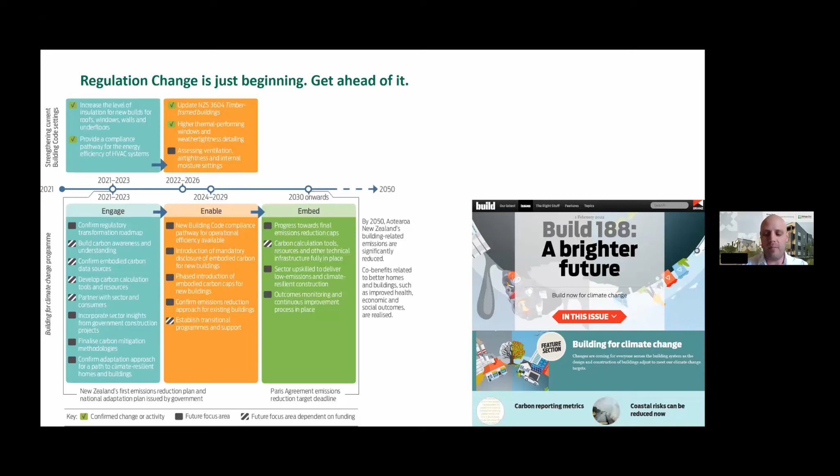Speaking of the future of our industry, it's always nice to look a bit at the past history of where we've come from. This is work that my colleagues at Kāinga Ora have been doing, modeling the heating demand of a 3-bedroom, 2-story standalone timber house.

I know this group will be really interested - we set the ventilation rates to keep at around or under 1,000 parts per million of indoor CO2 levels. We adjusted the thermal resistance of the thermal envelope to align with the different minimum building regulations from 1977 to now, then projected out looking at the different Homestar version 5 requirements. So we get down to the end here where we reach that magic number 15, which is the certified Passivhaus requirement, which we've looked at and are doing on the Ngā Kāinga Anamata project.

Looking at this graph, I really like to point out that we're about to take really big steps forward over the next 10 to 15 years. You can see that we're going to do more in terms of energy efficiency and decarbonizing our buildings than we have since pre-1977 onwards.

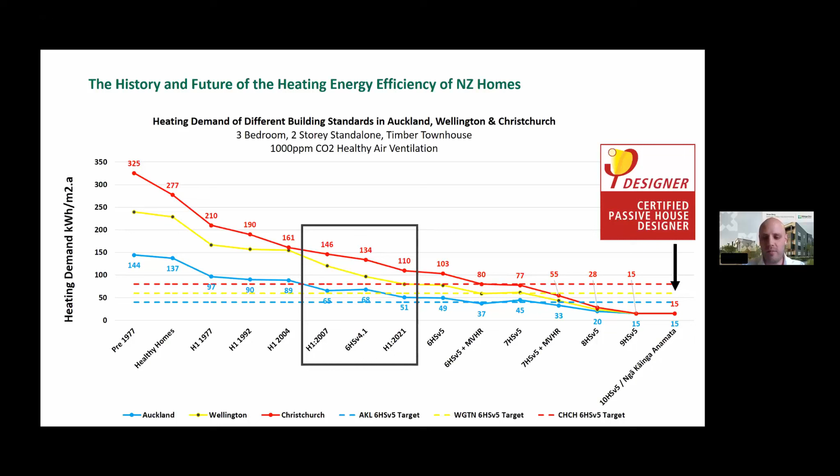This is again the same kind of graph, but looking at the electricity use of these buildings, plotted against an indicative energy hardship target, which I've set at around $25 per week.

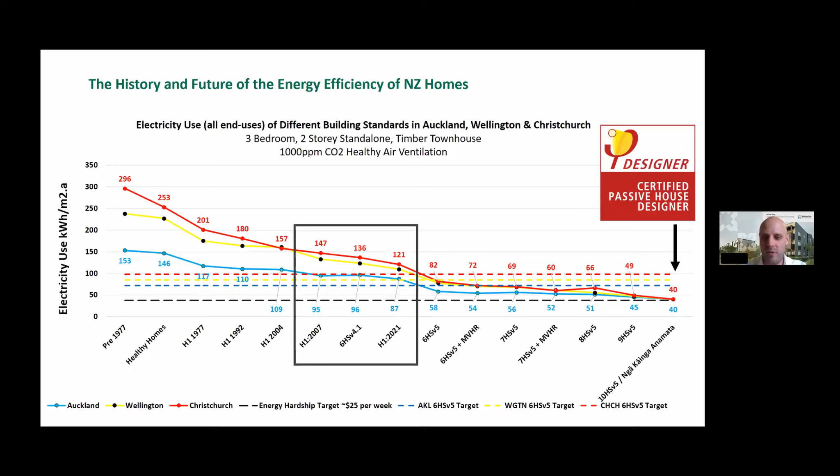We're at a stage where we hope to see transformational change coming through our sector, as we move from buildings in Christchurch requiring an EUI of 147 kilowatt hours per square meter per annum, down to levels like we've achieved, or hope to achieve, on Ngā Kāinga Anamata, which is the MBIE Building for Climate Change draft final cap of 40 kilowatt hours per square meter per annum.

This is the one we all know and are familiar with, and this is from the indicative draft caps that MBIE has put out as part of its operational efficiency framework.

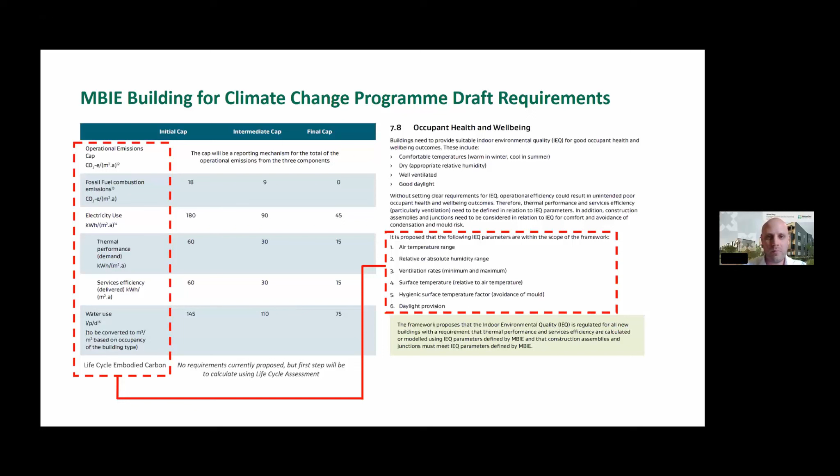This is what we call Kāinga Ora's carbon continuum, our interpretation of MBIE's proposed Building for Climate Change program, with the indicative dates they set out back-projected so we can see when we'll need to be working towards these different caps as they come in.

One of the key things we've been doing over the last two years has been aligning our innovation program to have buildings that we're designing and constructing aiming for the different caps under MBIE's Building for Climate Change program.

In the center here you can see some of the innovation projects we have underway: Bader Harvard, Bader Ventura, and Ngā Kāinga Anamata. Those are all three-level walk-up apartment-style housing, all located in Auckland.

Bader Ventura is aiming for certified Passivhaus, or what I'll call Passivhaus Classic. Bader Harvard is aiming for the Passivhaus low energy standard. And Ngā Kāinga Anamata is aiming for the Passivhaus certified standard, but we've also integrated renewable photovoltaic panels and are aiming to achieve net zero energy status, and we've looked at the embodied carbon impact of that building as well.

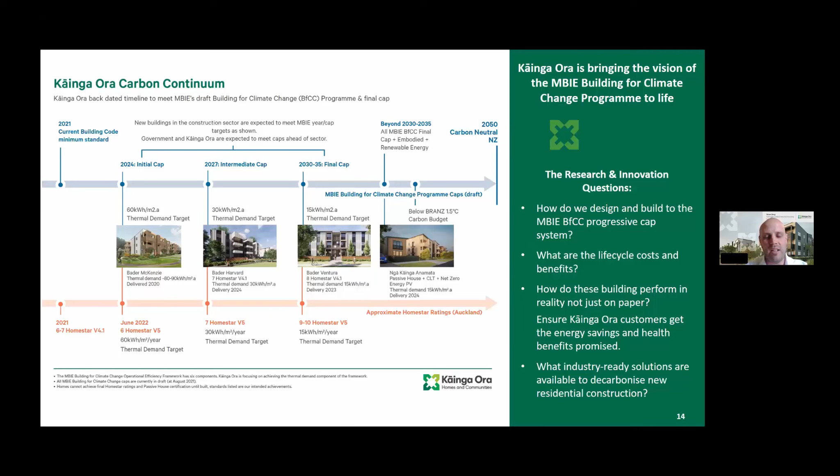The Bader Passivhaus projects, these ones are really special. They're underway and under construction right now. I'm really pleased to see a number of our project partners in the design team are actually on this webinar at the moment, so I just want to say thank you so much to all of our project partners for their hard work in making this come to life and possible.

The special thing about these Bader developments in Mangere is that they're all located in the same area, which you can see on the map. We have Bader Harvard, the low energy standard, and Bader Ventura, the Passivhaus standard, so we're going to monitor and evaluate both buildings to see how the different standards work in reality. We also have the same design and construction team working on both projects.

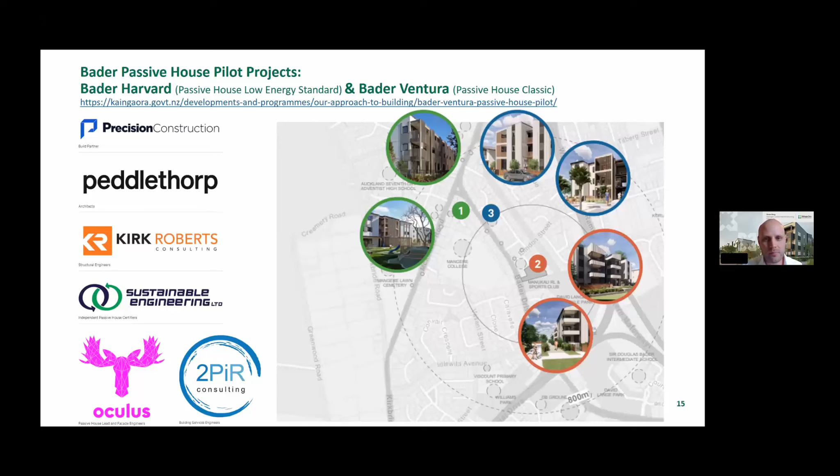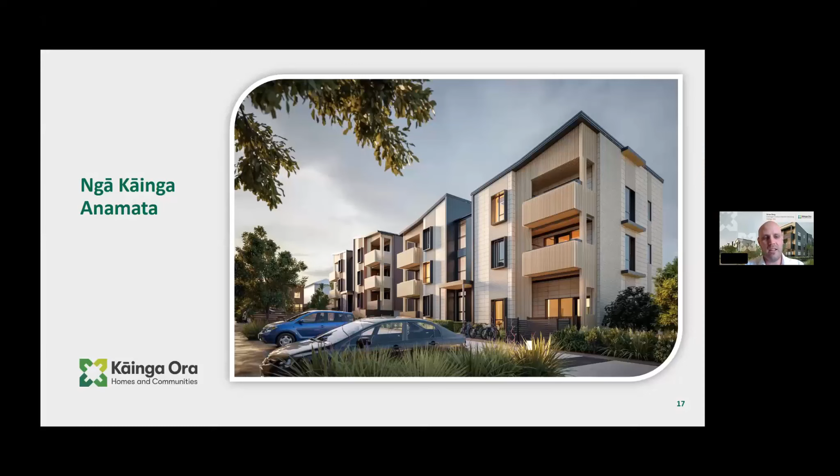This is a snapshot of the architectural renders from Peddlethorp, so Ngā Kāinga Anamata. I just want to acknowledge the people we've worked with on this project who have done all the hard work and made it come to life.

Ngā Kāinga Anamata, we entered this project into the COP26 Built Environments Virtual Pavilion that was launched in November last year. That virtual pavilion is still live, we're Project 11, you can log on and learn more about the project. We have our sustainability report online and a number of videos.

It's also important to emphasize that we're not the only Passivhaus project that was a finalist on the pavilion. There were 17 other projects, selected out of a pool of around 900 global entries, and of the 17, I think from memory at least 4 or 5 are Passivhaus projects on display, including the Monash University Passivhaus building in Melbourne.

So talking about the life cycle carbon impact of the Ngā Kāinga Anamata project.

On Ngā Kāinga Anamata, we took a science-led, evidence-based decision process when we were designing out the life cycle carbon impact of the building. One of the first things we did was conduct a life cycle carbon assessment with BRANZ and evaluated the carbon performance of our standard typical construction.

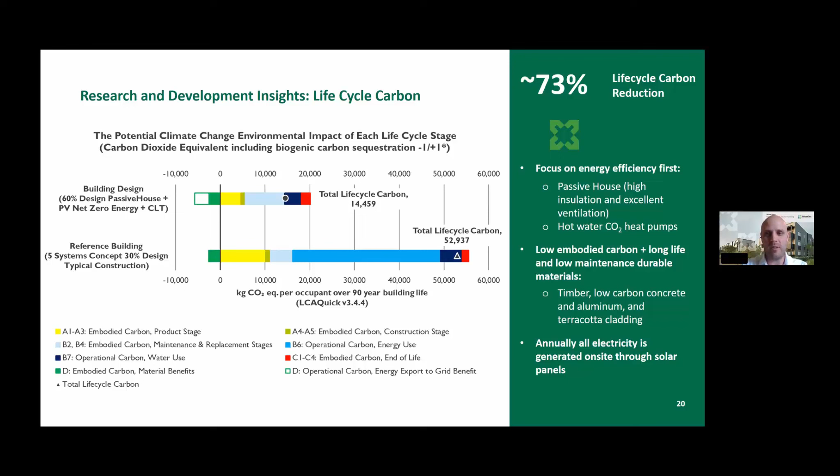We did focus on the embodied carbon impact of the building as well, and a conscious effort was made to select low carbon materials and products where we could, and where we couldn't, we prioritized the use of materials and products that had environmental product declarations, and these are some of the ones that we used listed.

This is how we calculated the life cycle embodied carbon of the building, and yes, we did include the embodied carbon of the photovoltaic panels. That's why you can see those up the top as the highest, most contributing material to the life cycle embodied carbon.

One of the really interesting things you need to consider when you're designing to reduce the carbon impact of buildings is to think about the timing of the emissions and where that carbon is being used throughout the life cycle of the building.

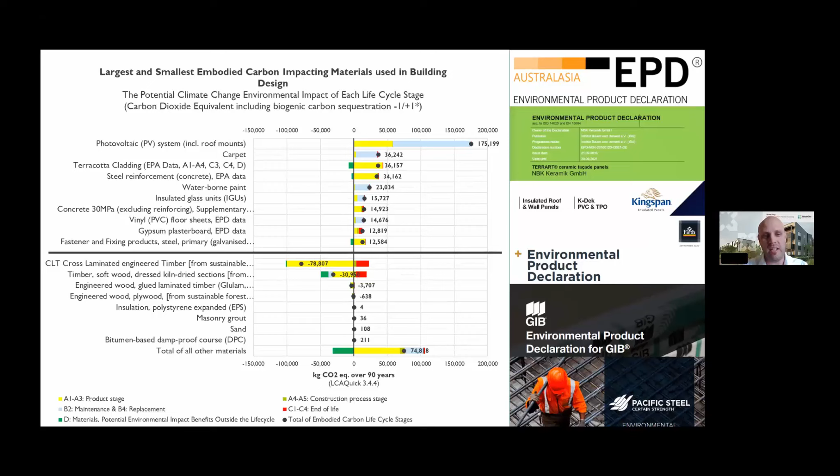One of the results that always surprises me is the impact that carpet has on the carbon impact of buildings. In this CLT build, the Passivhaus option, it's the second highest carbon contributor. That's really due to the maintenance, but also the replacement of the carpet, where we've assumed that it needs to be replaced every 10 to 15 years, over a 90-year building lifespan.

Getting close to wrapping up now, but I do have some more slides which we'll make available. I just want to say, while we reduced the carbon impact by 73%, and that's a really good first start, it's job started, not job completed. We're still 1.4 times above a 1.5 degree carbon budget for new residential construction here in New Zealand.

That's the BRANZ and Massey University carbon budget. These results I actually need to update now, because every year that we aren't decarbonizing globally, there's less carbon for our new builds to use.

And so while the dotted line you can see plots that carbon budget per occupant housed, in reality, when we consider the timing of emissions, we actually have less and less carbon every year as we move out towards 2050.

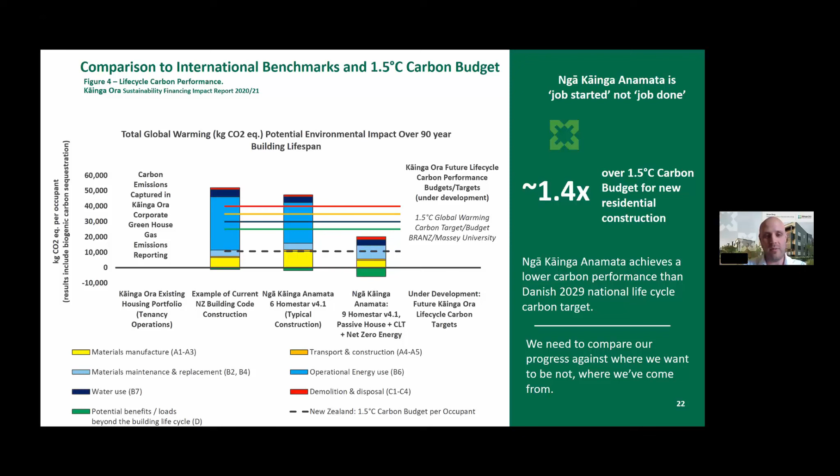These are some of the things you can do to design embodied carbon out of your buildings, and again, re-emphasizing that this cuts emissions now, not in the future. I would just like to say, building smaller homes is absolutely critical. It makes buildings cheaper and it also saves carbon.

Really, we need to be thinking about the use of glazing in our buildings. Again, it saves money, it saves carbon, it reduces overheating. And then I'd also really like to encourage everybody to start doing building life cycle carbon calculations on their builds.

It might be that you only do it on one project, but start doing it now. Start learning what it means, how to do it. So then when we get to 2024 and MBIE brings life cycle carbon reporting into building code, we're all ready to go.

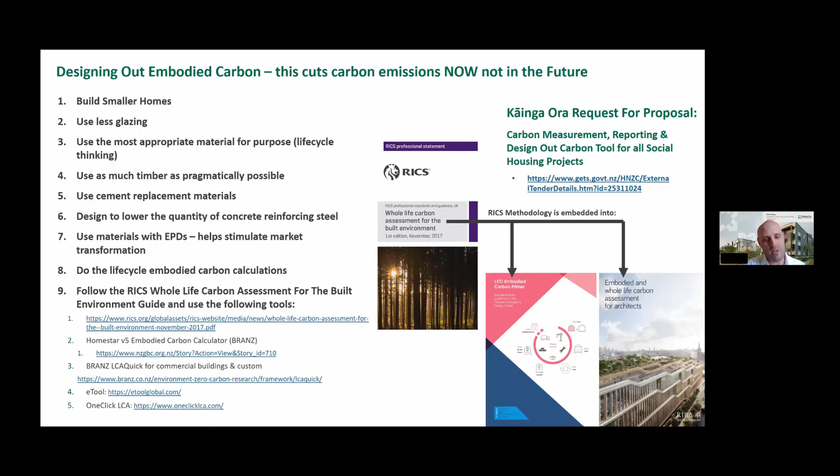There are a number of things you can do now. There are a number of tools. There's a whole bunch of information. And I would suggest one of the best things you can do for keeping up to date is to get on LinkedIn and follow organizations like One Click LCA, eTool, NZGBC, Passivhaus, and people like Jonathan Holm, who's on this webinar. He's fantastic for putting out insightful and educational posts on LinkedIn. I'm really proud to say we can do all this right now. We have all of the solutions available to us. It's just up to us now as an industry to start doing it at pace and scale.

Final slide. One of the things I'm going to be doing at Kāinga Ora over the next year: we released an RFP in January for a carbon measurement and reporting tool. As part of our decarbonisation aspirations, and in line with the carbon neutral public sector goal, we need a tool we can use and deploy on every public and supported housing project to calculate, measure and report on the carbon impact of those buildings, and then use that tool to improve their energy efficiency, design out the embodied carbon, and design out the operational carbon. So watch this space, and I'll finish up there. Thank you.